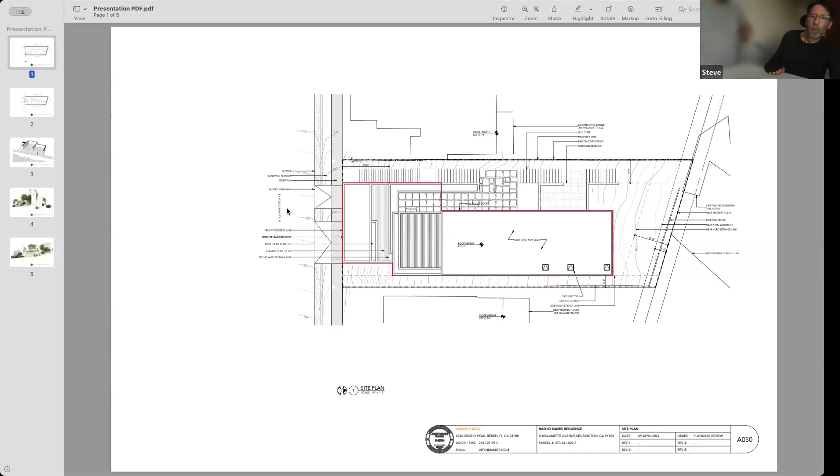I stand here? Yeah, just so the mic can pick you up, and the camera too, if you like, it's more important that you're heard rather than seen. So I'll keep this short since we've all looked at it before. Is this them? Okay, you're seeing my screen? Yes, great.

Okay, really quickly, this red outline is what we presented last time. The issues back then were an objection to having the garage right at the property line in the front, the overall size of the project, view considerations from 255 Willamette, and view considerations from 144 Purdue. So the revised plan, again outlined in red, is a 2-car garage set back 4 feet from the street, open parking next to it also set back—well, it's open, so the setback doesn't really mean anything—and a smaller house that's pulled back for view considerations from 255 Willamette, and also narrower for view considerations from 144 Purdue.

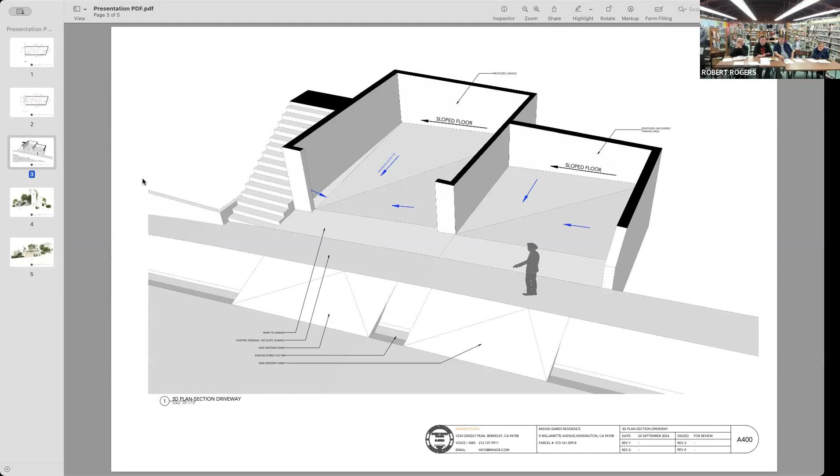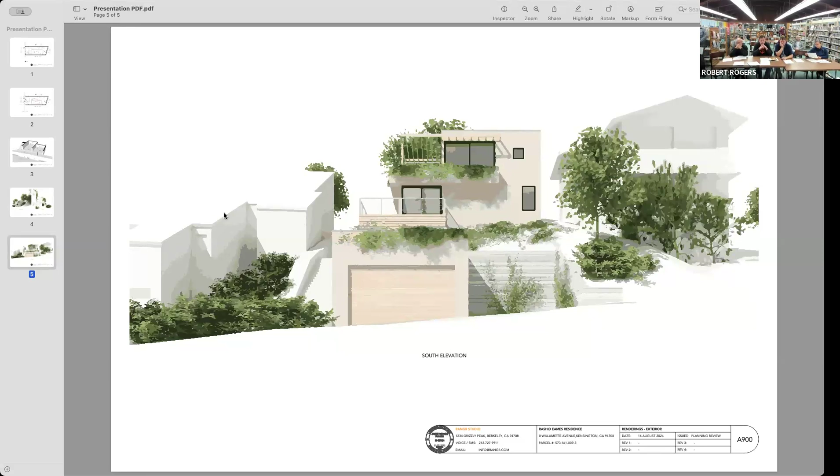I don't think I have anything more to say than that. I'll just leave it open for questions later on or now.

Just again, it's a thoroughfare for children, and I'm 2 houses away. I'm 8 feet back. Larry's next to me, and he's 7.5. 8 feet's not really enough. I almost hit a kid before, and then now I have to creep out really slow.

It's probably not a precedent you want to set, even though the precedent exists. I don't know that that's the best precedent to follow. It's not so much a following of a precedent, it's as these things go, if it exists, someone has it and therefore one has some kind of right to it.

I agree that having parking on that steeper slope is difficult. But 2 mitigating things. One is cars have backup cameras, which is great. But it's also quite simple nowadays to add a very small camera with a large screen in the garage for very little money, which I think could be something that's easily installed, so that you can actually see from the wide angle camera at the garage on a screen as you back up. I too back up off of the hill, and I gotta slow down and look carefully.

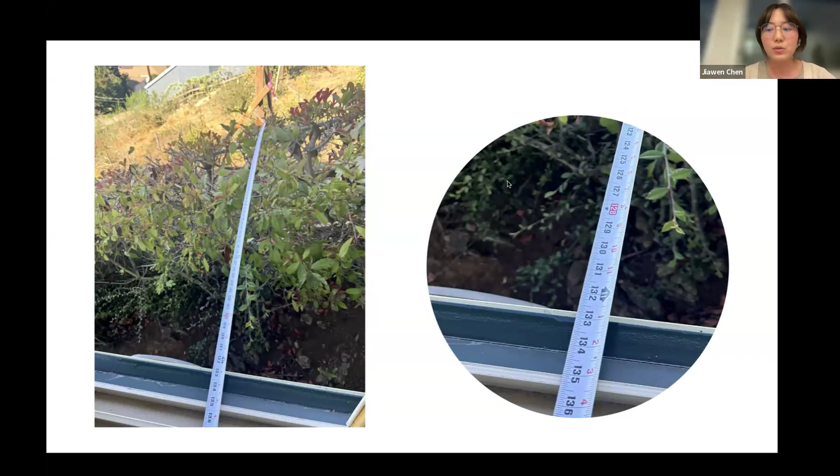Then is our master bedroom. This photo was taken on the bed, where I sleep every night. Yeah, so it's quite disturbing. And then on the other side, it's better, but still.

There are actually other problems, but due to time, I'm only showing these three that are concerning us the most. I think what I pointed out are very basic things. Also, the construction itself is problematic in terms of environmental impact, emergency evacuation, fire prevention, etc. So I will stop here and hand over the rest to my husband, Han Qing.

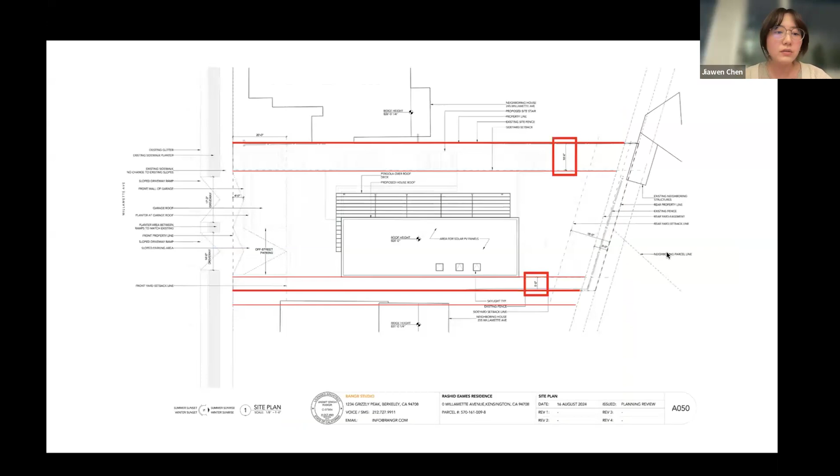Thank you so much for being here tonight. I live at 255 Willamette Avenue with my wife, Jiawen, adjacent to the proposed project on the east. We moved in during the pandemic, so it's the first time seeing some of the neighbors. Nice to meet you all.

As my wife said, we saw the drawings and the posts, and we want to say that we see the improvement and we appreciate the effort. However, it does not change the fact that the design still has a significant impact on our basic living conditions. Unfortunately, I have to say no to this proposal, and I want to say that the fact itself is beyond any comparison and relative improvement. In addition to this obvious blockage shown in the photos, I want to use a few slides to discuss the side setbacks condition as an example to argue that obvious design alternatives could be considered before moving forward.

So first slide here, we can see there is a 10 feet setback on the drawing from the west, adjacent to Larry's house, and there's only 5 feet from our side, which restricts this wall-to-wall distance to, as my wife said, about 10 to 11 feet between the proposed project and my house. As reiterated, most of our windows are on this wall.

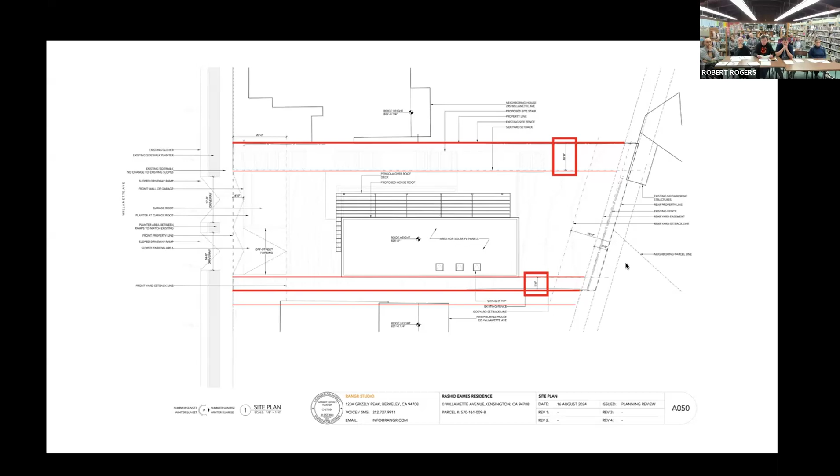What's more, if we zoom in—can you click to the next slide? The lower floor plan has another 10 feet setback from the setback line. So there's 20 feet of room from the fence, and there's room for the deck and the landscape, etc.

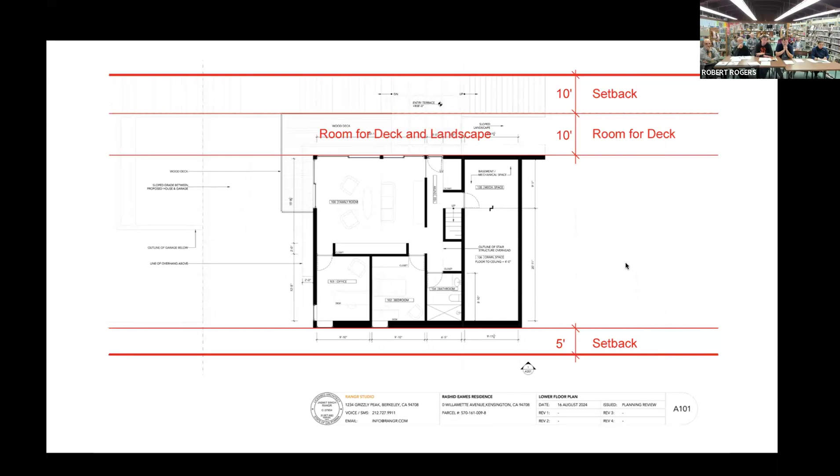So in other words, those things are design elements. The wood patio, they are exterior and fairly close to the ground. In other words, they are not blocking anything. It is the building itself that stands as the extruding and obscuring object that blocks the sunlight and exposes the privacy problem. Can you go to the next slide?

And the upper floor intensifies that situation. There's another 13 to 15 feet setback from the lower floor. So in total, there is a 35 feet distance from the upper floor to the fence on the west. And at the same height on our side, there is only 5 feet from the constant wall.

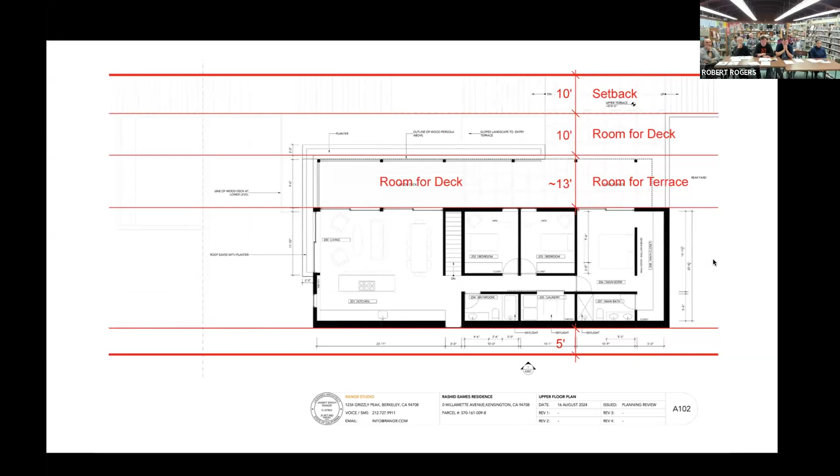In this slide, you can see—can you go to the next slide, please? This slide is much clearer, showing how the interior floor is in proportion to the lot and its geographic relation to my property on the east.

So I understand why those design decisions are made. I'm more than familiar with the design languages as a landscape designer myself. With the current design, the owner will have a better bay-facing view, better light, better privacy, which are somehow exactly what we would partially lose based on this design. And it's a bit unfair to take that away from us.

So I think the current residents—me and other community members—are as important as the new members. And I believe there are alternative design solutions, and the owner has a great architecture team to work with. So I think with better collaboration, we can develop something better.

Such as a lowered building, deeper excavation, and shifting the location, just to name a few. Ultimately, it may come down to the size and volume again. I know that's challenging—for example, pushing back the front setback means more excavation and more expense. But the condition was right there when the lot was purchased, so the challenges should be acknowledged at the very beginning.

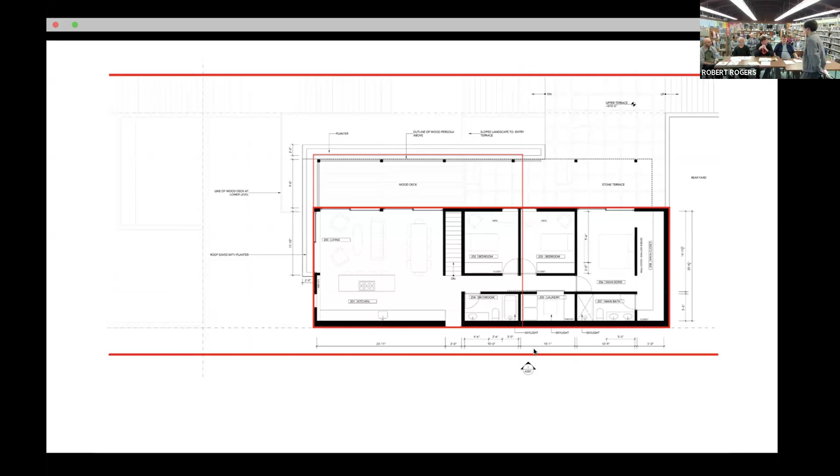Anybody else have questions? Anybody else want to be heard before we move forward?

Okay, I have a question for you, which is, why not move it? Would it make any difference if you moved the bulk of the house to the west, away from this gentleman? No, there are some reasons the house is where it is, obviously. One is that the Kensington code requires a combined total 15-foot setback on two sides.

It makes much more sense to put the stairs on the west side because the lot is actually less steep on the left, so there's less excavation. The way we figured it, we've kept the stair excavation to not have any more than a 3-foot difference between existing grade and stair, and the reason for that is beyond 3 feet, we need foundations. It would be better for us not to put foundations near a property line, which is to say the property line in the west.

Anshling is absolutely right that if we were to have open space in the design, we would want it biased toward the west. So the stair combined with the open space leads us to want to put the 10-foot setback on the west side rather than the 5-foot side, or rather than the east side, which is Anshling's side.

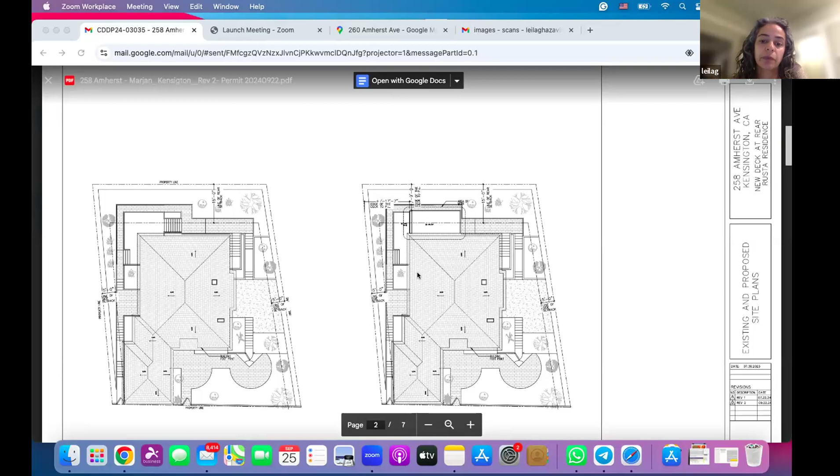The reason we asked for a variance is because she would like to have the opportunity to use the outdoor area as well as indoors, and add more value to her quality of life. When you live in Kensington, besides the beautiful neighborhood and safety, one of the reasons people go there is to use that view. On the lower level there is a deck, but it's on landscaping and there's no view there, it's blocked by the fence and the next door property's building.

So she would like to add a balcony on her main floor, which is the same level as the street of Amherst, and that's also her living area.

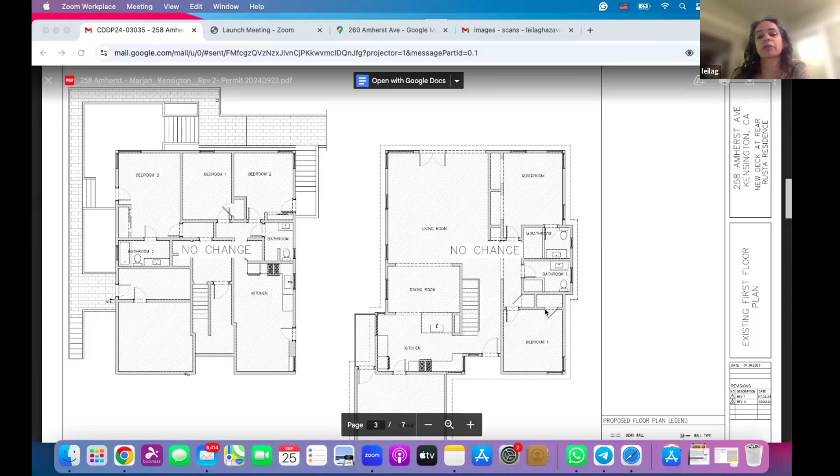As you can see the existing— sorry, can someone, go ahead, I can't hear you well. There's no change to the plan since we last reviewed it last month. So I just thought maybe there's a new member. No, there's no change on the floor plans.

We visited both the site where the application is at 258, and we also visited 260 Amherst, and we were able to view potential impacts from inside the neighbor's home. So if there aren't any changes to the design, we did go over all of that last month. If you wanted to go over it again, it's your right, but I don't think it's necessary.

Your call. I can stop here and we can hand it to you, and the owner is there. Do you want me to stop sharing, or do you need to see the floor plans?

That's a nice picture. We came to visit, thank you for coming, and thank you for opening your home to us early. We did take a look.

If I recall correctly, you had expressed to me that you didn't think it was going to work as far as trying— one of the suggestions was, what if you were to shift the balcony to the north? Would that help? You said from a design point of view and from a mitigation point of view it didn't work because you didn't think it would make a difference.

Yes, it will, and I think from a viewpoint perspective, it's not going to make a big difference in how Donna's view is going to be.

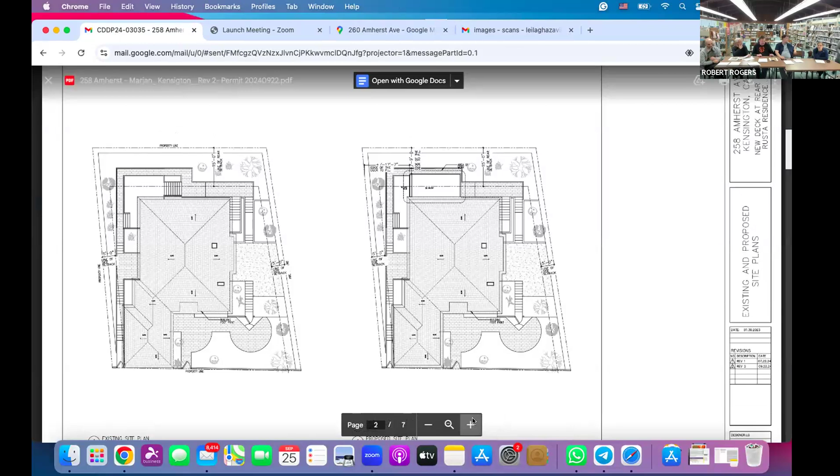I appreciate you coming to the house, and everyone has seen it. For me, moving it just a few feet makes a big difference. You had fog yesterday, but we get sunsets through that angle. We even get sun in the bedroom's closet when the sun is setting far to the north, like it is now. Last week I've been opening the closet door to get the sun in, but moving it just a few feet would make a big difference for me.

And one issue, that's the view of North Bay and Mount Tamalpais from the kitchen and the front bedroom next to it. Whatever happens on the deck, I will be hearing it in my kitchen. And as I said when you were visiting, we're both very quiet people, but that is going to be an adjustment.